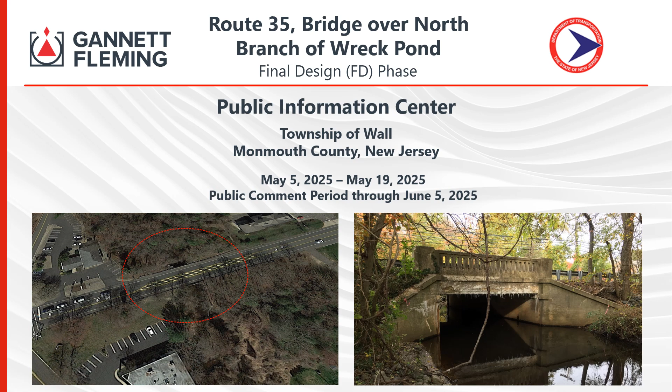In this presentation, we will provide the purpose and need for the project. We will also go over information on the project's background and existing conditions of the project corridor. Additionally, this presentation will present the proposed bridge and roadway improvements and discuss the preliminary traffic management plans during the construction period. Finally, we will review the status of the project and offer an opportunity for comments and feedback.

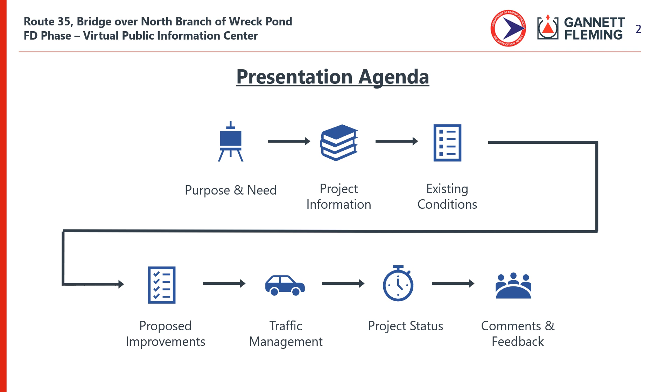The overall purpose of the project is to replace the bridge which carries New Jersey Route 35 over the north branch of Wreck Pond Brook. The structure is in poor condition. The purpose of this presentation is to provide local residents, officials, and businesses with information and allow opportunity for feedback on the Route 35 over north branch of Wreck Pond Bridge Replacement Project.

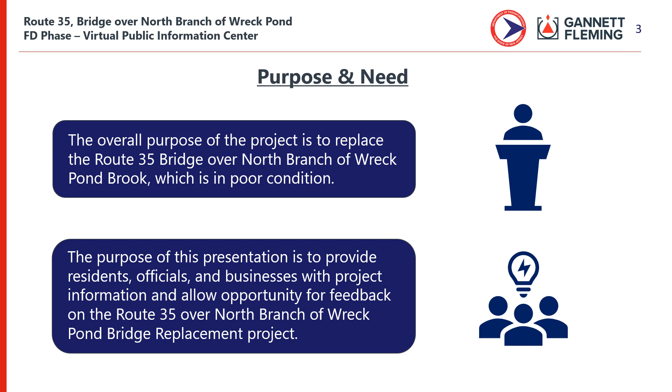We will now review the project information. Route 35 is a New Jersey state roadway that begins in Berkeley Township of Ocean County and ends in the city of Rahway in Union County. Route 35 passes through the Township of Wall as it traverses in a south to north direction through Monmouth County, New Jersey.

At the project location, Route 35 crosses over North Branch of Wreck Pond, which flows west to east at milepost 18.2. The project corridor is less than 1/4 mile in length, extending beyond the bridge on each side of the north branch of Wreck Pond from Route 35 milepost 18.11 to milepost 18.28.

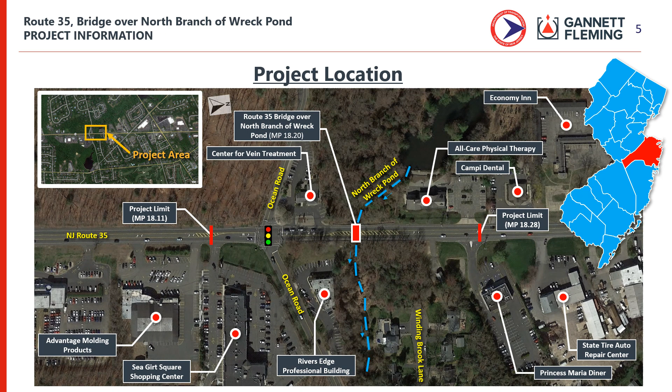Within the project limits is the signalized intersection of Route 35 with Ocean Road. Generally, the properties located within the project limits are commercial properties. The greater area surrounding the project includes multiple shopping centers and residential communities. There are local and regional commuters that depend on this important Route 35 corridor.

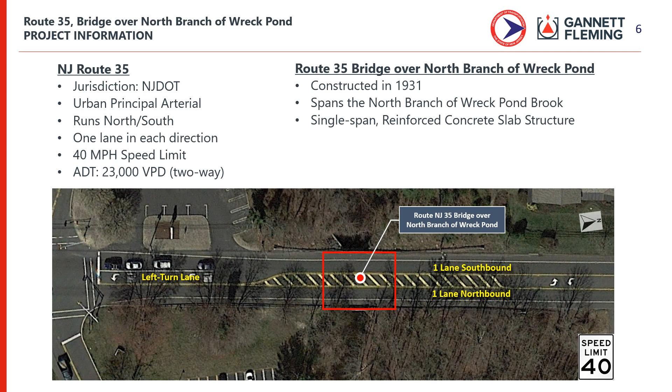The bridge is a single-span reinforced concrete slab structure that carries Route 35 over the north branch of Wreck Pond. The structure was originally constructed in 1931. The roadway in the project area runs south-north and is considered an urban principal arterial with one travel lane in each direction at substandard shoulders. The posted speed limit is 40 miles per hour, and the average daily traffic count for two-way traffic is approximately 23,000 vehicles per day. The roadway is under the jurisdiction of the New Jersey Department of Transportation.

We will now review the existing conditions. The bridge superstructure and substructure are in poor condition. The existing section includes one 12-foot lane northbound and one 12-foot lane southbound, separated by a 12-foot striped gore area, as well as two 7-foot outside shoulders.

As southbound vehicles approach the intersection of Route 35 with Ocean Road, the 12-foot striped gore area tapers and transitions to a 12-foot left turn lane. North of the structure, the 12-foot gore area becomes a two-way left turn lane.

There are no sidewalks in the project area and no curb ramps at the intersection of Route 35 and Ocean Road, so pedestrian travel is not ADA compliant. The roadway is considered very congested with a high crash rate. Additionally, current safety features such as the guide rail, connections, and parapets are outdated and require replacement with current standards.

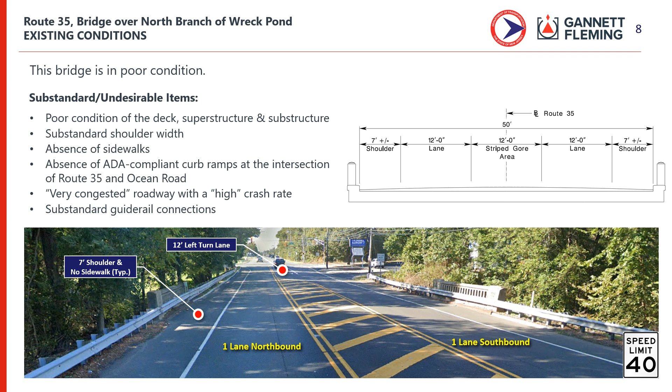The following photos demonstrate the poor rating of the substructure.

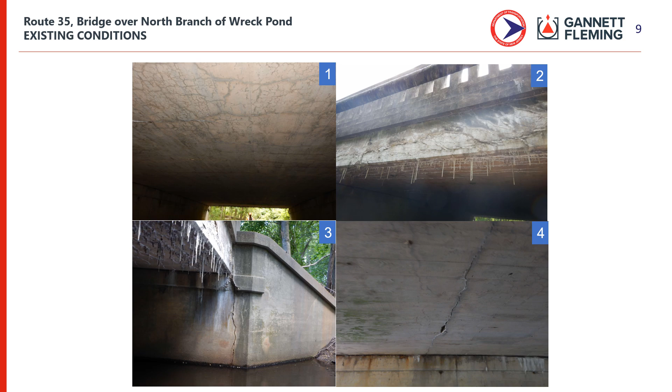We will now review the proposed improvements. The proposed design eliminates all the deficiencies and substandard, undesirable items that were listed in the previous slides.

The bridge will remain single span but will be replaced with a precast concrete rigid frame structure. The new bridge cross-section will meet the requirements for lane, shoulder, and sidewalk widths.

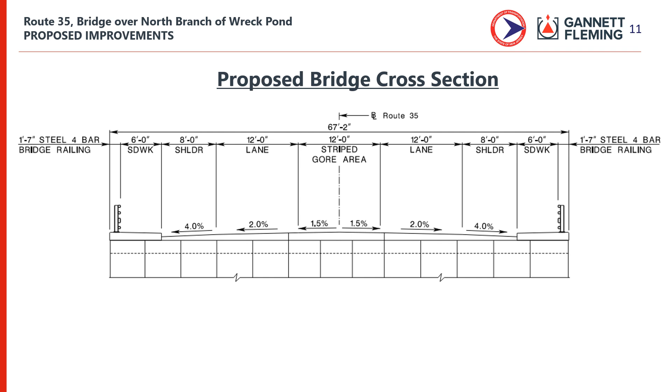While the existing lane configuration is maintained, the outside shoulders will be widened by 1 foot each to provide standard 8-foot shoulder widths in both directions.

In addition to the widening of the outside shoulders, the introduction of sidewalk on both sides of the structure improves the out-to-out bridge width from 54 feet to more than 67 feet. The introduction of 6-foot wide sidewalks is a major improvement as compared to the existing condition, which has no sidewalks.

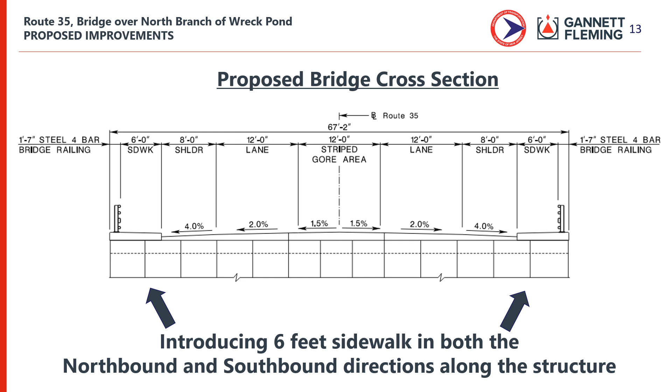Currently, the cross slopes along the existing bridge are relatively flat, leading to increased roadway drainage issues in the area. The proposed design introduces standard cross slopes across the lane and shoulders to improve drainage flow along the bridge.

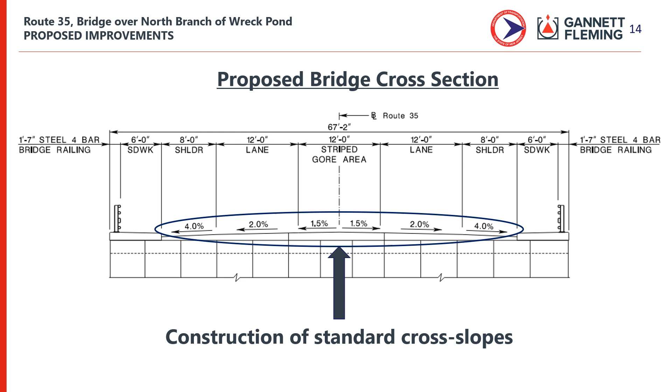The proposed roadway profile is similar to the existing profile, so the pavement work will mostly consist of milling and variable overlay with minor areas of full depth pavement. The full depth pavement sections occur only where the roadway is widened or at crossings where drainage pipe is installed.

The existing flared wing walls that require replacement will be accomplished using U-shaped wing walls to limit the amount of fill in environmentally sensitive areas. The U-shaped wing walls will run parallel to the roadway.

The proposed bridge foundation will be concrete pile caps supported by steel pipe piles, and the existing 20-foot wide hydraulic opening will be maintained. Additionally, the proposed bridge will feature a steel 4-bar bridge railing instead of concrete parapets to provide a more open bridge design.

The proposed bridge replacement structure will meet all current geometric and safety standards and eliminate the current substandard elements within the existing Route 35 section.

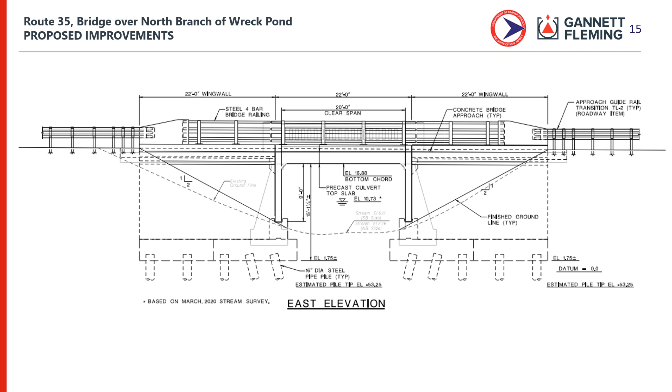Along with the proposed bridge replacement, additional improvements will be made to the intersection of Route 35 with Ocean Road.

ADA-compliant curb ramps with pedestrian crosswalks will be installed at 3 of the 4 corners of the intersection. Additionally, push buttons and pedestrian signal heads will be updated for ADA compliance, and existing utility pole lighting will be updated to meet current requirements.

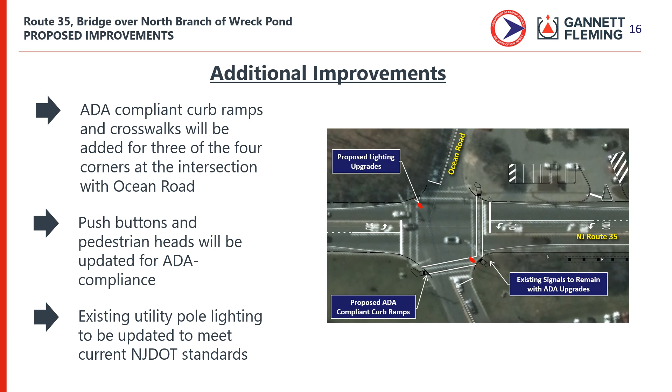Traffic signal analysis was performed and verified that the existing phasing and timings are optimized for vehicular traffic for the design year, so no phasing or timing modifications are proposed.

Additional improvements are also proposed to relieve the drainage issues that occur in this area.

The existing inlets at the low point just north of the structure will be relocated and replaced to accommodate the minor roadway profile adjustment in the area.

A new inlet and pipe crossing will be installed near the driveway entrance to the MUA pump station to collect more drainage. In the northwest quadrant, a headwall and gabion mattress are proposed to replace the current drainage that outlets at the existing wing wall.

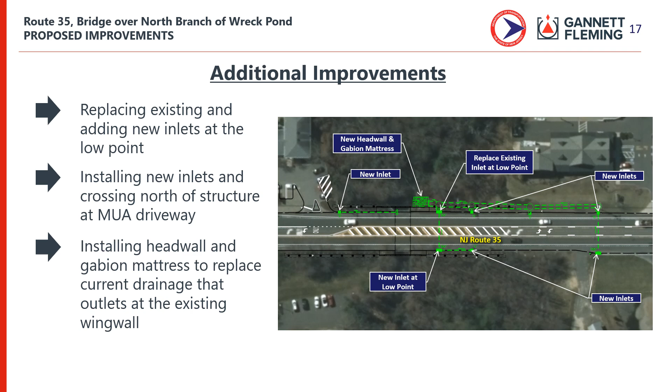All guide rail attachments and end treatments will be upgraded to current standards. The driveway closest to the intersection at the northwest corner is substandard for offset from the intersection, based on the current New Jersey State Highway Access Management Code, creating a potentially unsafe condition.

This driveway will be closed, and the remaining driveway will be reconfigured to accommodate two-way traffic.

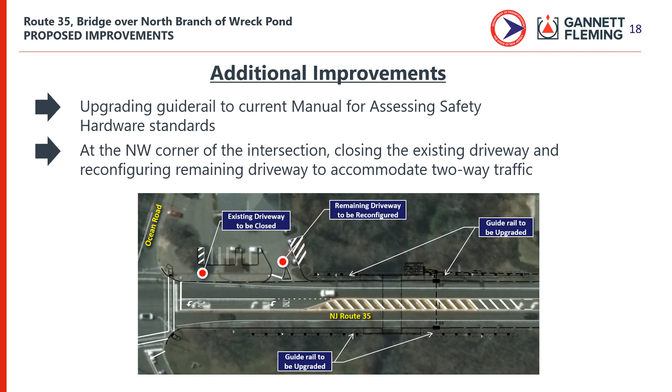Existing utilities within the vicinity of the bridge include cable, electric, gas, telephone, water, and sanitary.

The existing water main on the northbound side of the bridge conflicts with the proposed design. Wall Township Water and Sanitary has confirmed the scheme of accommodation for the water main relocation offset and under the stream, also utilizing the directional drill installation method.

There are existing overhead facilities on the southbound side of the roadway, which conflict with construction of the proposed design. To limit tree clearing and environmental impacts, these JCP&L overhead electric lines will be relocated to the northbound side of the roadway.

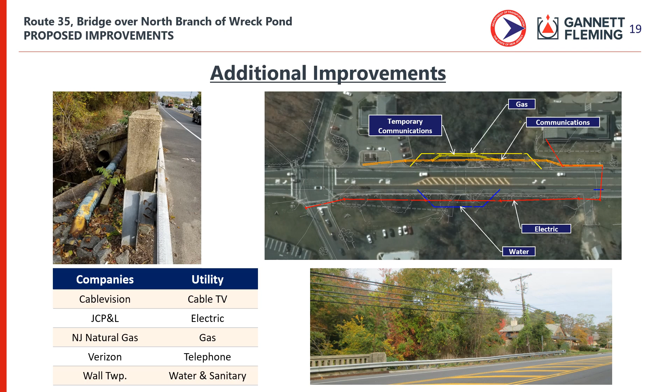The communication lines owned by Verizon and Cablevision will remain on the southbound side of the roadway, offset from their current location. There will be a temporary offset of the lines to accommodate construction activities for the aforementioned headwall and gabion outfall.

We will now review traffic management.

The proposed bridge will be constructed in 3 major stages, working across the roadway, maintaining traffic in both directions as well as pedestrians to the extent possible. Stage 1 will construct the northbound side of the bridge, Stage 2 will construct the center of the bridge, and Stage 3 will construct the southbound side of the bridge. The safety of motorists, pedestrians, and construction personnel, maintenance of access to local businesses, and reduction of construction duration were priorities during design of all construction stages. The 3 stages of construction will be further explained in the next few slides.

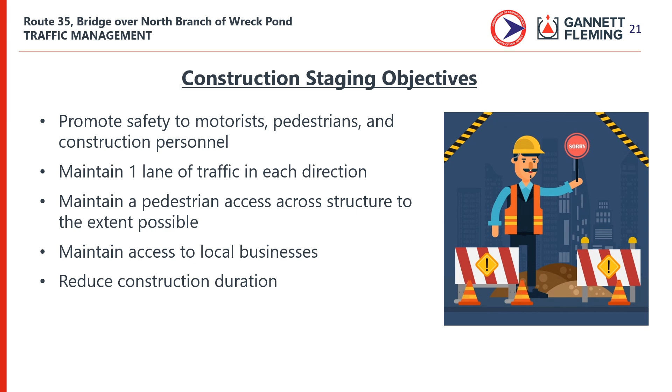Stage 1 will involve demolishing and constructing the northbound side of the bridge, while shifting all traffic to the southbound side of the bridge. There will be one 11-foot travel lane in each direction with a 4-foot shoulder during this stage. A 105-foot left turn lane will be provided for vehicles turning from Route 35 southbound to Ocean Drive eastbound. The duration of Stage 1 is approximately 7 months.

Stage 2 will involve demolishing and constructing the center portion of the bridge, while shifting traffic to the outside of both the remaining portion of the existing bridge and the newly constructed bridge portion from Stage 1. There will be one 12-foot travel lane in each direction, with a 6-foot sidewalk along the northbound side for pedestrian access across the bridge during this stage. A 120-foot left turn lane will be provided for vehicles turning from Route 35 southbound to Ocean Drive eastbound. The duration of Stage 2 is approximately 5 months.

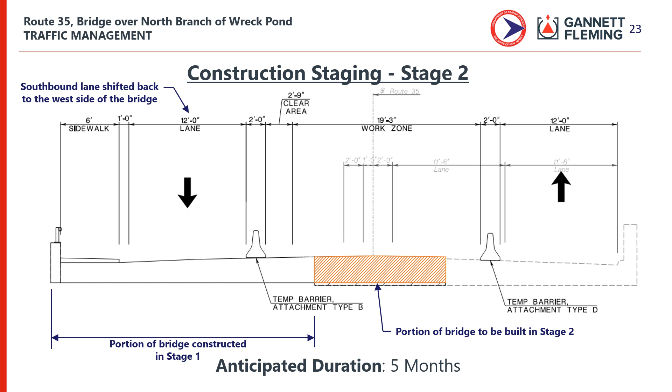Stage 3 will involve demolishing and constructing the southbound side of the bridge, while shifting all traffic to the newly constructed northbound side of the bridge. There will be one 12-foot travel lane in each direction with a 6-foot sidewalk along the northbound side for pedestrian access across the bridge during this stage. The duration of Stage 3 is approximately 12 months.

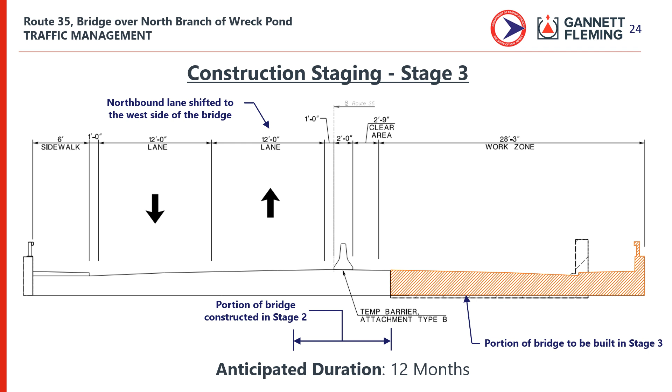We will now review the project status. This image shows the NJDOT project delivery process. The project has graduated through the problem screening, concept development, and preliminary engineering phases, and is currently in the final design phase. In this phase, the designer is responsible for managing project communications and project contracts, completing all engineering and environmental processes, preparing the final design submission, and certifying the construction contract documents.

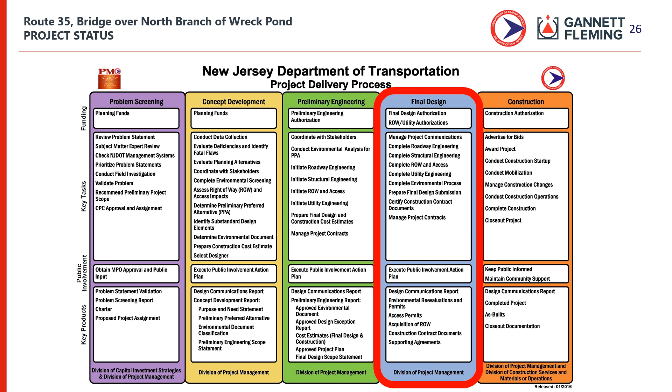Once the final design phase is complete, the project will advance into the construction phase, where the project will be advertised for bids and ultimately construction is to be completed. The project will complete the final design phase this September of 2025, and the start of the construction phase is anticipated to be in February of 2026. Completion of construction is anticipated to be May of 2028.

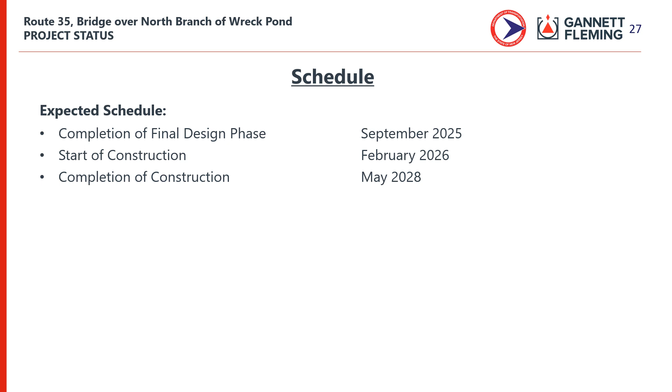We will now provide information on how to submit comments and feedback.